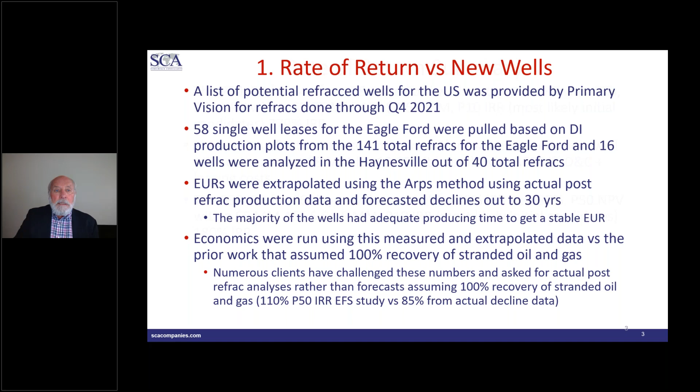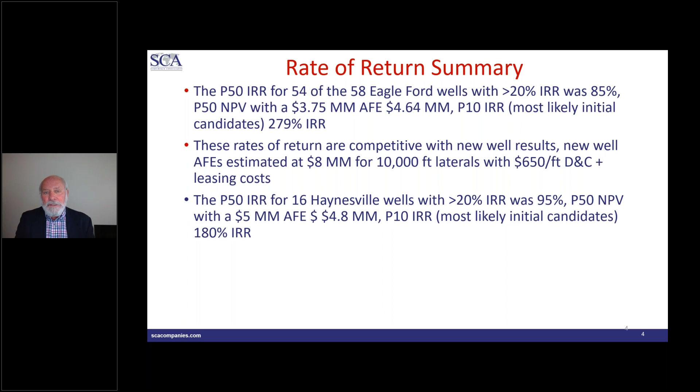Basically, the P50 rate of return was 85%. So that's pretty good. I used a 20% rate of return cutoff, and 54 of the 58 single well leases met that cutoff. We assumed basically 8 million for the 10,000 foot laterals on the economics for the new wells. The Haynesville was similar, getting a P50 rate of return of 95%. Definitely competitive. And the thing is, your first refracs are probably going to be from your P10s, not your P50s, and the rates there are way off the charts.

New wells are not a constant. You could have a 50 barrel a foot new well or a 60 barrel a foot new well. If you've got a lot of 60 to 70, 80 barrel a foot new wells, you probably can't compete with refracs. But look at this chart here in the Eagle Ford: take an average GOR of 1054, your P50s at 85%. You've got to have 55 barrel per foot wells, assuming 10,000 foot laterals, to make that new well have a higher rate of return than the refrac.

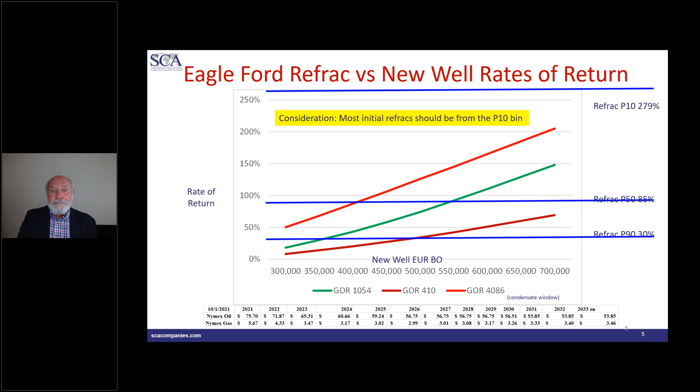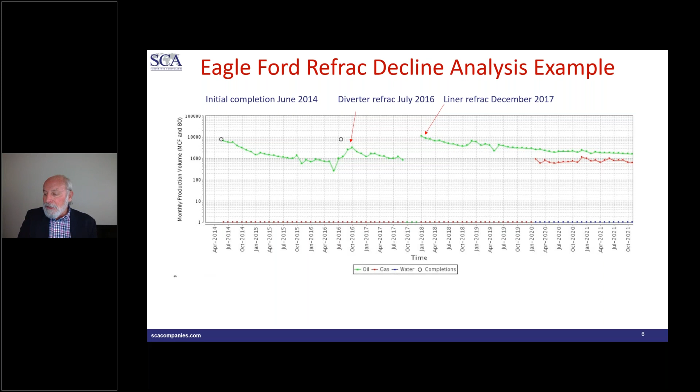So it's definitely competitive. Some examples - this is one from the Eagle Ford. It actually had two refracs: a diverter refrac in July 2016, and then a liner refrac in 2017. Pretty good decline number, more than enough data to get a good decline on there. All these had more than enough history to get a reasonably good tie - we didn't have any with just a few months production, most were pretty good. The original completion was 776 pounds per foot, 17 barrels a foot loading, 51 foot clusters.

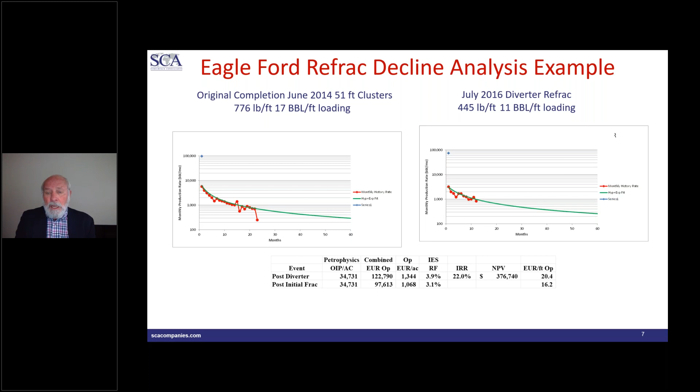The diverter refrac actually had a positive rate of return, albeit 22%, with a recovery factor of about 3.9%. The original recovery factor was 3.1%, and the diverter refrac in 2016 increased that to 3.9. It was actually economic, assuming a 1.5 million diversion refrac cost. But the big money is the liner refrac.

In December 2017, they did a liner refrac, 17-foot clusters. Here's your loading on top there, pretty much typical loading for recent wells. Look at the economics on that: 79% rate of return. That works all day long.

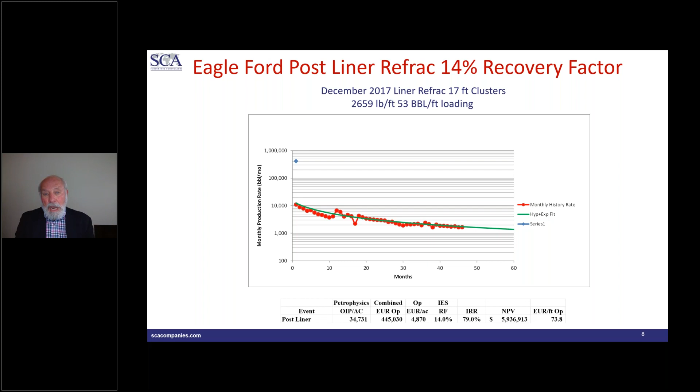The key thing there is the recovery factor. Theoretically, you've got a 15% maximum recovery factor for any of these, given the solution gas drive. This was getting close to 14%, and we'll show you in a little bit that that's actually higher than what we're seeing on new wells in the area, which was very interesting. We didn't expect to see that.

Cluster spacing - it's all about cluster spacing. This model was for the Permian, but very similar perms here to the Eagle Ford and really organic shales in general, liquids rich. You had 50-foot cluster spacing on the original frac model, and basically 5.9% is predicted.

The actual was 5.8. This was not the well we just showed, but another well we just looked at. The rate of return on the left side, depending on the 20-foot cluster spacing, we're seeing a little bit better than that. But at any rate, it's 9.6 versus 11.4.

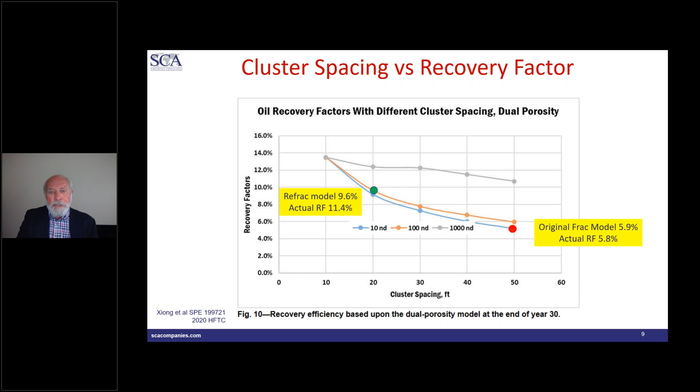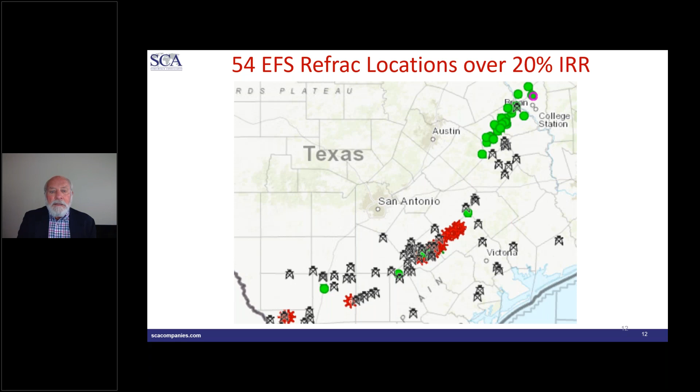One thing that was interesting in one of the areas was that the actual post-refrac recovery factors, which basically took the cumulative production prior to the refrac and then the extrapolated UR from the refrac forward, you're seeing an average of 72 barrels a foot on these recoveries, where the new wells with pretty much identical completions, actually a little bit higher proppant loading for that matter, 46 barrels a foot.

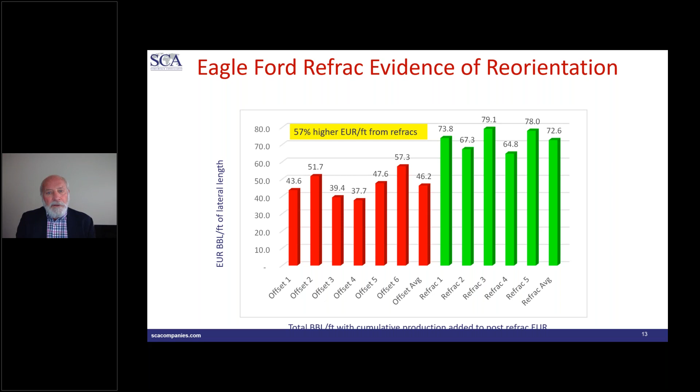And you can see the distribution there. It's not just a random picture. It's fairly consistent, and these are all pretty close to each other.

So we think it's evidence that your fractures are reorienting. You could be getting some from having a little bit more frac length, but that's unlikely because typically frac lengths, you don't see too much in the production history matching or interference tests more than 300-400 feet at the most. So longer lengths, I don't think are going to help you that much, but they may. We think reorientation is what's going on.

So that's interesting. Now, again, that's specific to the Eagle Ford. I'm not saying you're going to have this in the Haynesville because the Eagle Ford's got a relatively low stress anisotropy. So you only have to deplete the well about 1,000 pounds to overcome the maximum stress contrast that the original well had. So at most depth.

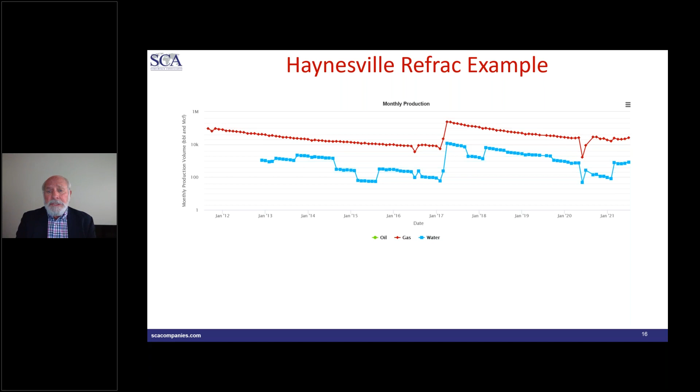So anyway, but Haynesville's next. We looked at that. We had 16 examples. Here's a good example from there. Definitely got a good uptick from the refrac. There's your post-frac analysis on that particular well. 81% rate of return over in Bienville Parish.

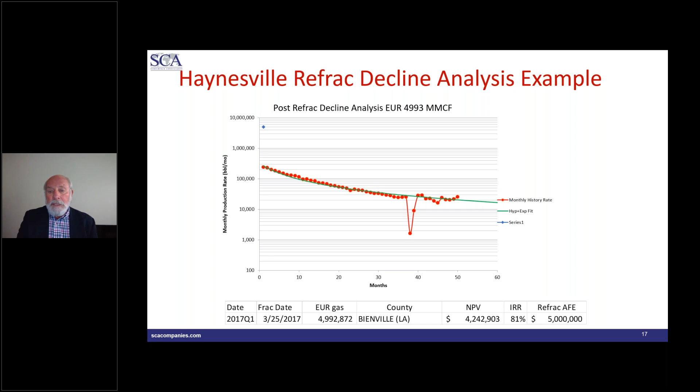I've used a $5 million AFE on the Haynesville and a 3.75 for the Eagle Ford, but pretty strong, and so basically I think all 16 were economic. There's your numbers there, distribution. Again, your first ones are probably going to be in the P10, which is going to be around 200%, which is definitely competitive with new wells.

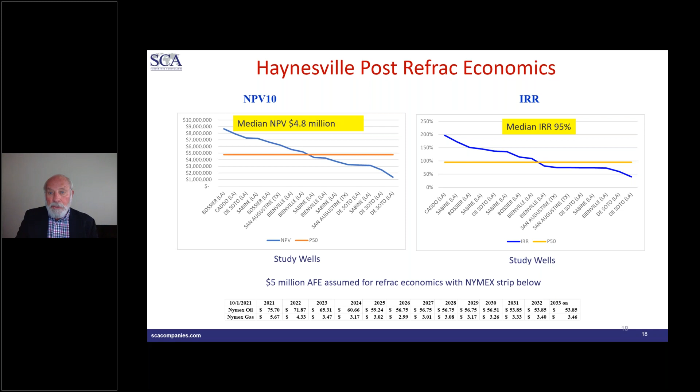I mean, the argument that refracs are not competitive with new wells is just not really supported by this data. It might have been in the past when they had diverter-only jobs where you don't have the mechanical isolation, but with mechanical isolation, the risk is largely eliminated on the execution, and then they're getting that down pretty well.

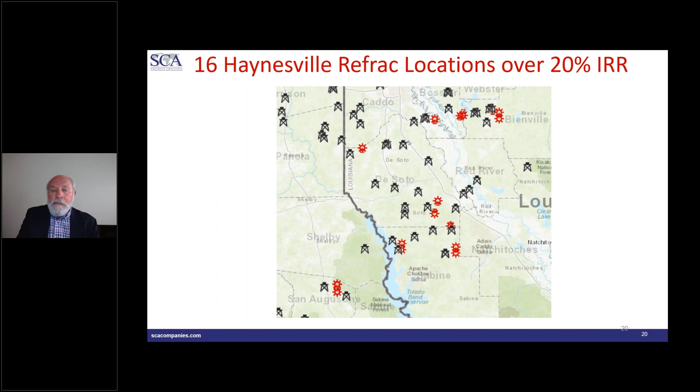Here's where the locations are, pretty well spread throughout, most of them in Louisiana. That's where most of the activity is anyway, so it looks good in the Haynesville as well.

The next big benefit in terms of rate of return, being larger in some areas, is that you protect infill child wells from asymmetric fracs. There's a lot of evidence showing this is a problem. It's probably the 800-pound gorilla most operators aren't really dealing with, based on conversations we've had, where they're using these quote-unquote small volume preloads, which basically do nothing to protect the child. They do help the parent from having to be cleaned out, but we'll show you examples where that was disastrous when they actually went with a larger volume preload, which is what you need to do if you don't refrac it.

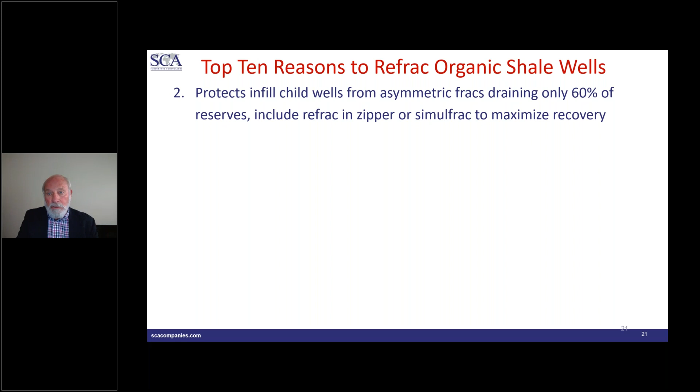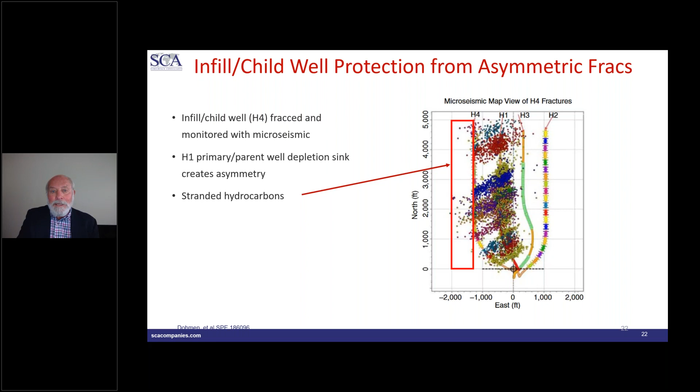The other thing that came out was the sealed wellbore pressure monitoring, showing the same thing - that parent well depletion basically created an asymmetric frac where the distal side of your frac is not going to be drained in the child well. So it's a huge problem.

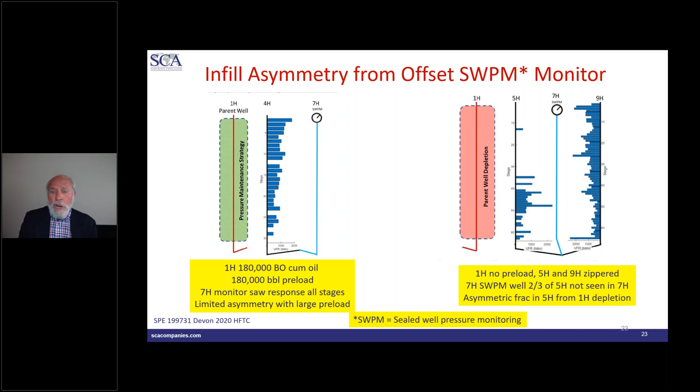How much of a problem is it? We'll get to that next, but really the only options you have here are to recharge the parent as a full volume preload, which you've got to elevate the reservoir pressure up pretty close to where it was originally, or you do a refrac. The volumes required are pretty substantial for that, but compare it to the cost of actually doing that.

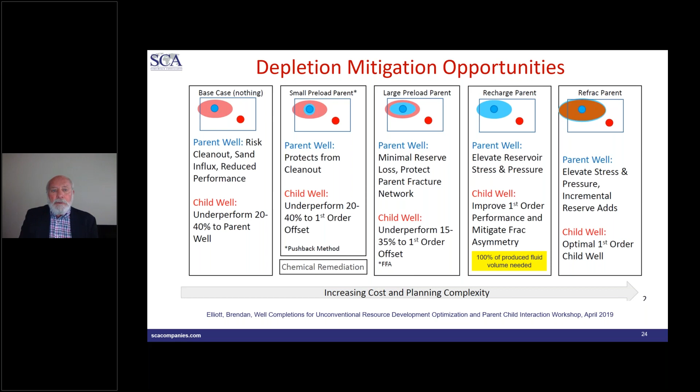If you've got a 500,000 barrel new well with a GOR of 1054, basically your PV10 loss is over $4 million. So the loss of production from the child well not being protected by the parent well refrac can be almost as much as the rate of return on the entire refrac. It's definitely a big number, but a lot of people don't really want to deal with this for some reason.

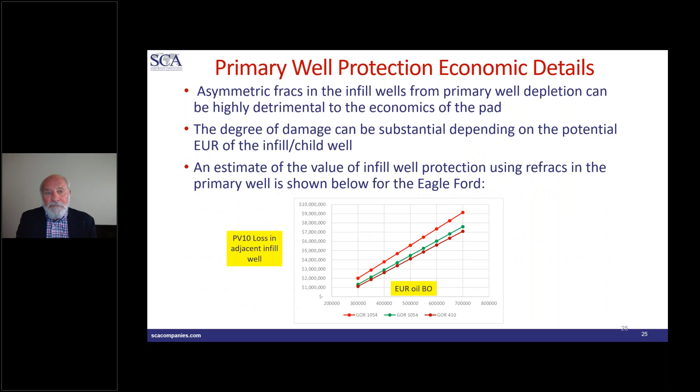We got a case study from the Delaware Basin. Again, it's not Eagle Ford or Haynesville, but this is again mechanical in nature, not necessarily formation specific. They did a 225,000 barrel preload and a 157,000 barrel preload on 2 wells. The initial EURs were just about 1.3 million on both. Post preload, it was bad - one was down to 500, one was down to 107. So basically, with these 2 wells, you could have paid for 9 refracs with what it cost you on just the parent well production loss, not so much the child well.

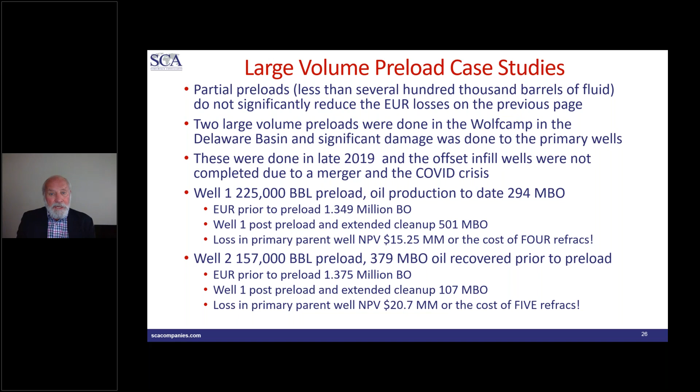They never did offset this - this was a well that came in. These were done right before a merger. So there's your numbers - you're chugging along pretty good, strong EUR, but putting all that water volume in there, you just couldn't get it back. So a refrac would have been far superior here than trying to do the full volume preload, which again is the only other option - small volumes don't really work.

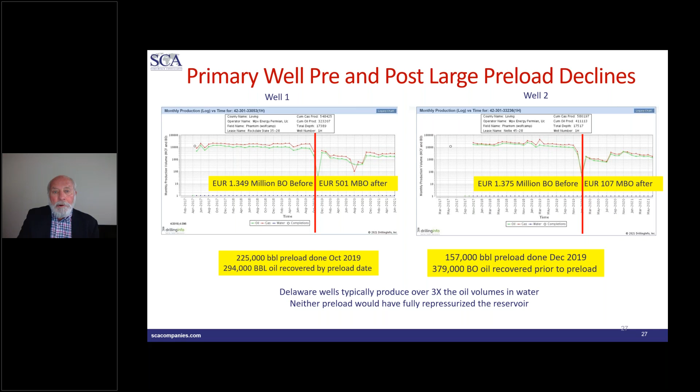So the next reason: you've got a huge volume of stranded reserves. Again, the cluster spacing is really what drives it. Refracs can have 3 to 4 times the original recovery factor. A lot of these older wells with 50, 60 foot cluster spacing are seeing 2%, 3% recovery factors. It's basically cluster spacing that's the main driver, because we're actually putting less proppant and fluid in per cluster now with the newer fracs, just because you have more clusters.

I don't know any area in the world where you put larger fracs and get lower results. So we're actually putting smaller fracs on each cluster, but we're getting better results. That points to cluster spacing really being what's driving this. One study done in Eagle Ford showed only 7.5 feet of lateral distance being drained by each cluster, versus the 50, 60 foot spacing.

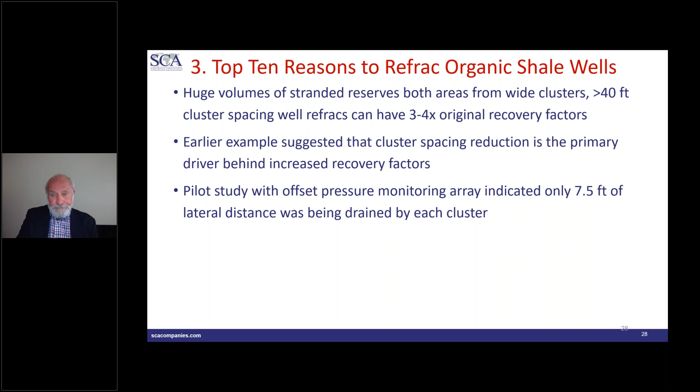The original Eagle Ford wells had over 100 foot cluster spacing, so there's a lot of undrained rock in there. Here's that pilot well done by Conoco, and again it was an eye opener, because basically only 15% of your 50 foot cluster spacing is being drained, so there's a lot of opportunity for increasing the entry points in between.

What we're seeing is that, by and large, the cluster spacing assumption from the model we had before is pretty spot on. We're seeing that pretty much as a maximum. If you've got 50 foot cluster spacing, and you use the plot we had earlier, you can predict what the recovery factor is going to be.

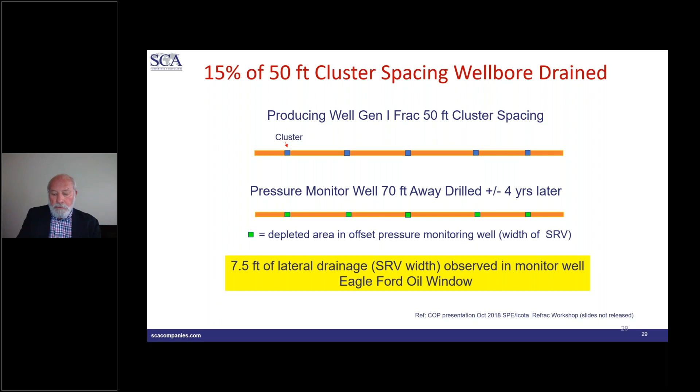How many wells have got large cluster spacing? Well, 2015 was kind of when everybody started getting on board. Again, you had a few people experimenting with some of them here, but by and large... let me get my pointer. I lost my laser.

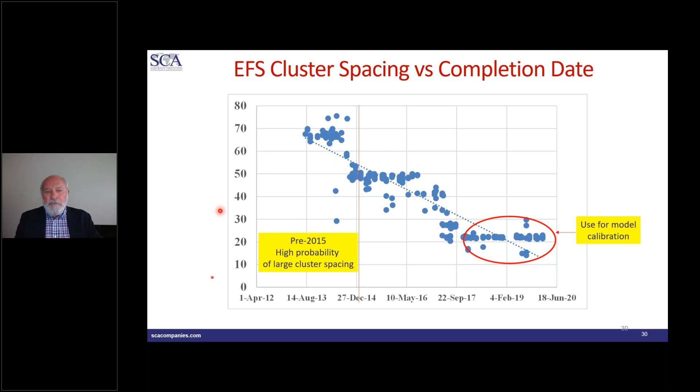Pre-2015 is probably the target-rich environment, although you've got some out here too. Keep in mind that a 40-foot cluster spacing with 60% cluster efficiency, which is what you typically get with diversion, is more like an 80 to 90-foot cluster spacing. So your nominal spacing may not be your effective spacing on these.

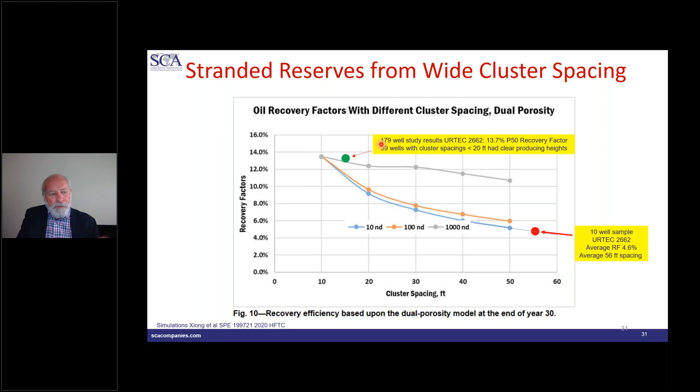You can actually back out the OIP from this, or the minimum OIP, if you just divide your cumulative production or your EUR, depending on what you want to use, by the recovery factor for this, and then do your 13-14% number. It's kind of a quick look, not to be replaced by the oil in place and gas in place number, but it's a method to use.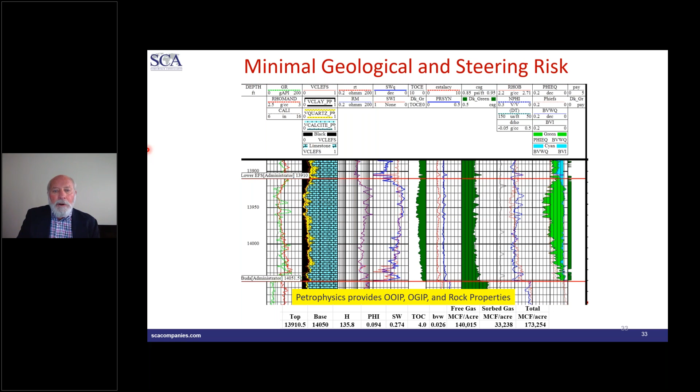The geological risk is minimal. You've already got the logs most of the time. Here's an Eagle Ford log, I think from DeWitt County, but you can go in and basically know what your hydrocarbons are, know where your lateral is. There's no surprises. You're not hoping and praying that you got the right zone, you're in zone, you know where you are. So you've got very little risk as far as what's going to go on there.

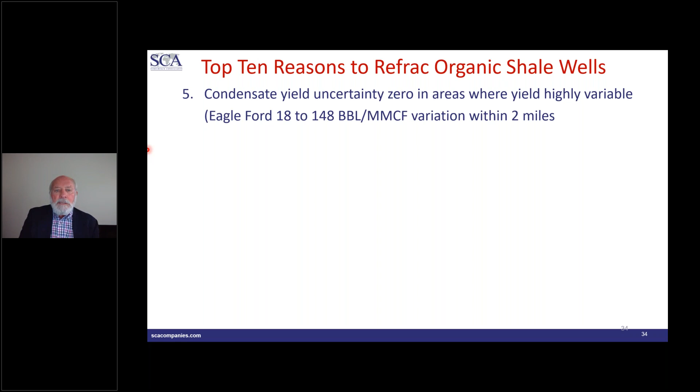One thing big in the Eagle Ford, you notice those little red spotted wells on the map. A lot of those are gas condensate wells, and basically the condensate distribution varies quite a bit. We saw 18 to 148 variation within 2 miles down in LaSalle County, which is the example we had next. So I mean, if you've already got a condensate yield prior to the refrac, from the original production, your refrac ought to be fairly similar, and it reduces some of this uncertainty. You can see there's a pretty huge range here. So that's a help. Okay.

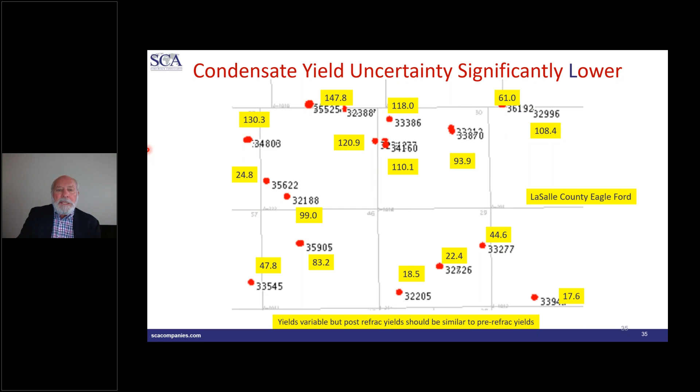One thing we know is that your recoveries are pretty much going to be consistent if you do a best practices refrac: fairly close cluster spacing, adequate proppant and fluid loading, slickwater, pretty much everybody's gone to that. 13.7% is what we're getting for a P50 on oil, 40% on your gas condensate, and 60% for dry gas. We don't have that many samples for dry gas, but it should pass the smell test, because conventional is a little bit higher.

To get the full 15% on oil and a full 70% or so on the gas, you'd think you'd have to have cluster spacing that's tighter than what people are using. Again, if you're draining 7.5 feet, and even with 15-foot clusters, you still have undrained rock there. That's what I think we're seeing with this reorientation. We think the reorientation is actually widening that window, and that's why the new wells underperform the refracs in that study we showed earlier.

The seventh thing is you've got less pressure on the supply chain. That's a big thing right now. You don't need new casing in the vertical section, tubing, pumps, all that. Basically, you've got a lot of stuff out there already that you need, so you don't have to go get it.

And with the supply chain issues now, that's not an insignificant factor. One thing one of the majors I talked to a few weeks ago was looking at real hard is if you get enough of these going and consistently hit successful results, if you're economic in all your cases, you've got PUDs.

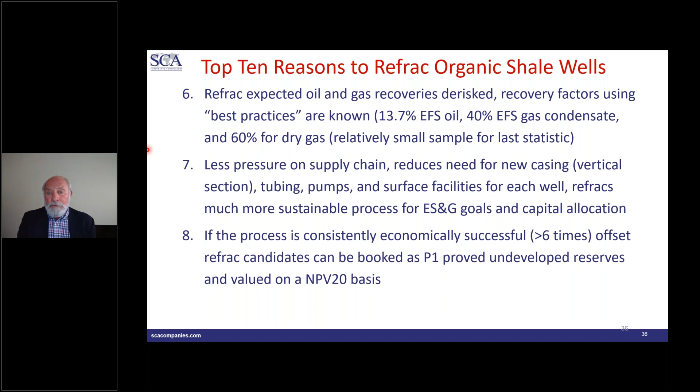And I've had 2 reservoir engineering groups bless this concept that basically you can book P1 reserves with refracs. Nobody's done this yet because very few people have this consistency. Back in the diverter days, you couldn't really guarantee that, and your EURs weren't going to be that significant. But with the liner days, if you can get back to almost the original total recovery factor from a brand new well, you got some pretty good PUD values there. That could be a significant addition to the asset base, but if it's done right.

Carbon footprint's a buzzword now. I don't know how many ESG conferences or ESG papers I see going on, but you basically don't have to drill a well, which is a huge carbon use. Just the drilling uses up to 40,000 gallons of diesel, which is quite a bit of carbon. So this is good for trying to check that box, which is becoming more and more important.

Again, no mob, no drilling. There's a lot of moving parts eliminated with the refrac. And then last thing, really the most important thing, because it's what points to being able to have successful refracs consistently without surprises, is mechanical isolation. With using expandable liners or cemented casing, the results on the reservoir are fairly similar. You're a little more expensive to use the cemented, but nonetheless you ought to be able to get the same results, and you ought to have a competitive rate of return versus new well drilling.

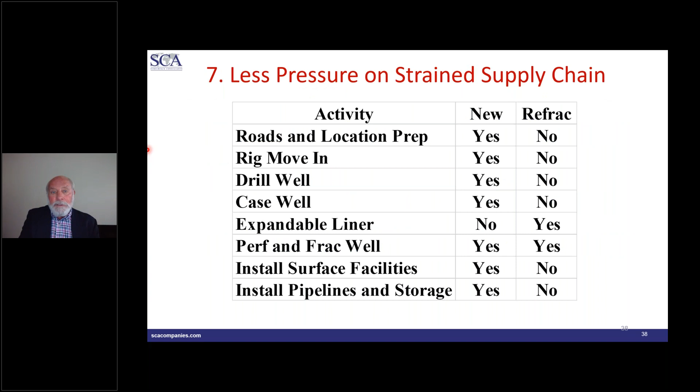Okay, these are the things that basically you don't have to worry about. A lot of moving parts are removed. This is the PUD discussion we talked about earlier, and there's the reference there. I can get you that reference if you want.

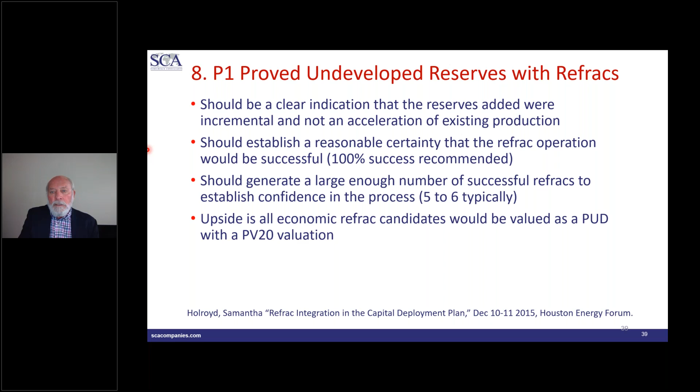So again, 5 to 6 times, that's not cast in stone, but basically you have to show that you're not going to mess up. You have to show that each refrac is going to be successful. With the proper candidate selection, which is fairly straightforward, the proper execution and best practices, the risk of failure is pretty low. It's never zero, but it's pretty low right now, a lot lower than it was back in the diverter days.

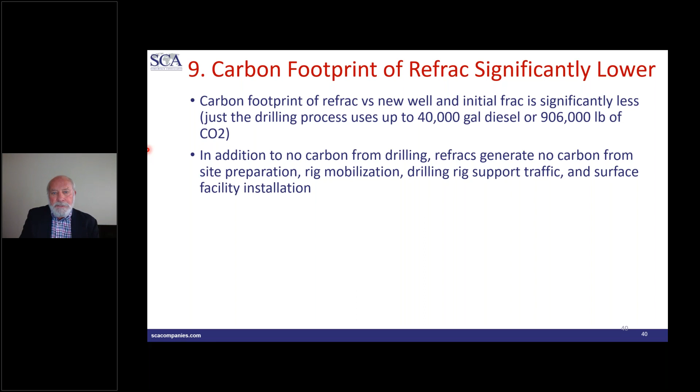The carbon footprint again, a lot less moving parts, a lot fewer vehicles going out there. The whole entire drilling process is gone. But the last part, the mechanical, it bears a little bit of investigation here.

Looking at XLE is very important, extreme limited entry, because one thing about XLE is a lot of the studies that were done, in fact almost all the studies that were done, were on new wells, where the reservoir pressure is fairly homogeneous among the clusters. And refracs are not that case.

You could have several thousand pounds of drawdown. The equation for the delta P required incorporates the delta sigma, the closure stress difference. It's near wellbore friction, breakdown pressure goes into that, basically any kind of tortuosity like near wellbore. Those are all factors in there you have to overcome.

The original rules of thumb of 400 pounds back in the 80s we used was making several assumptions that you didn't have that much heterogeneity. But now we're seeing that in order to get good distribution to control fluid loss into the lower pressure, higher permeability clusters or natural fracture areas, you need about 3,000 psi, and that number could be larger for refracs theoretically.

Again, because that's a new well, those 2 papers referenced there are all new wells. But anyway, you don't want less than that. And what we're seeing on a lot of these studies is that operators are still not really buying into this. Typically the ones we have in the example that went over with the refrac reorientation were all around 500 psi delta P.

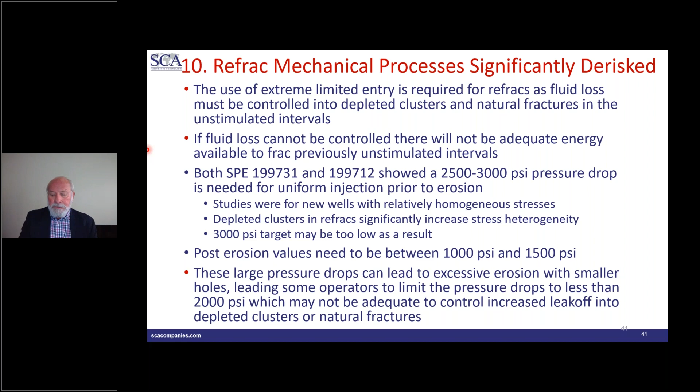There's one from Devon, a really good paper on the volume to first response from this sealed wellbore pressure monitoring. Basically the idea is if you've got high delta P's and you limit your fluid loss into the runners, then you're going to see a very long delay or high volume pumped before you see a hit on your offset well.

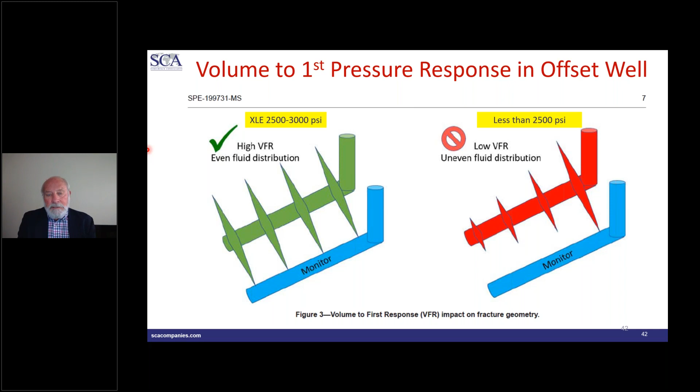And you're looking for pressure. You've got a pressure monitor on the blue wells that shows at the surface when the pressure wave hit from the refrac. Less than 2,500 pounds, you're going to see uneven fluid - you're going to see fairly early hits. There's been a lot of work on avoiding frac hits, but I think if we get everybody going to XLE and doing it right, I think those discussions are going to be reduced quite a bit.

Here's another plot here, basically showing that at 500 to 600 barrels, where a lot of these are, you've got a really low delta P there. You're not getting the delay. You're getting some runaways, you're getting some very early hits there on those little blue ones up to the left - these are very early arrivals. You're not getting high cluster efficiency. Out here, you're getting very high cluster efficiency.

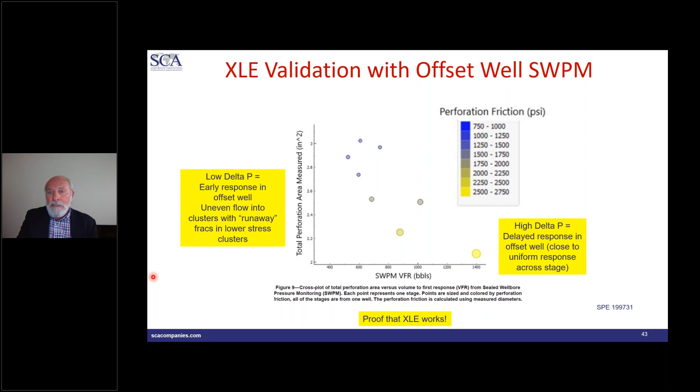And this has been backed up with fiber optics. There's a paper just presented a couple weeks ago at the Refrac conference, showing much better uniformity with the higher delta P's and the single hole at the top of the casing, which is what we're recommending - talk about that coming up. But yeah, this is definitely proof that it works, but it also shows that if you've got lower pressures, you can expect to have basically lower than you need cluster efficiency.

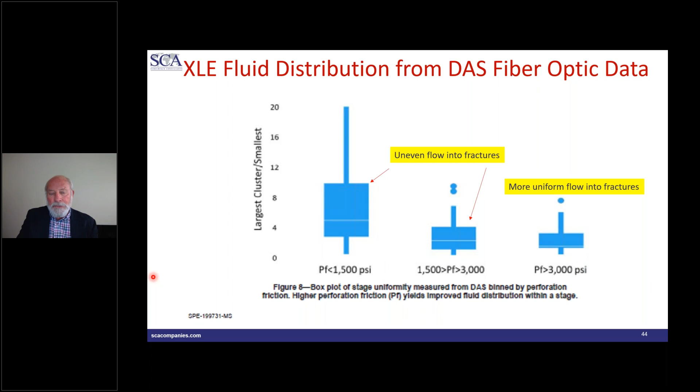Another case here, a lot much more uniformity with the higher delta P. Less than 1,500 pounds, huge scatter. So it's definitely a number that you need to look at. And like I say, most operators I've looked at, most of the completions I've looked at are not doing this for some reason. The big thing is post-erosion.

Here's one where they had 5,000 pounds pre-frac and pre-erosion, then down to about 400 or 500 pounds after it. So this is the big problem with the perforation erosion - you've got to try to have this effect minimized to get at least 1,000 to 1,500 pounds post-erosion. That's really the big number. The pre-erosion number is not as important as the post-erosion number.

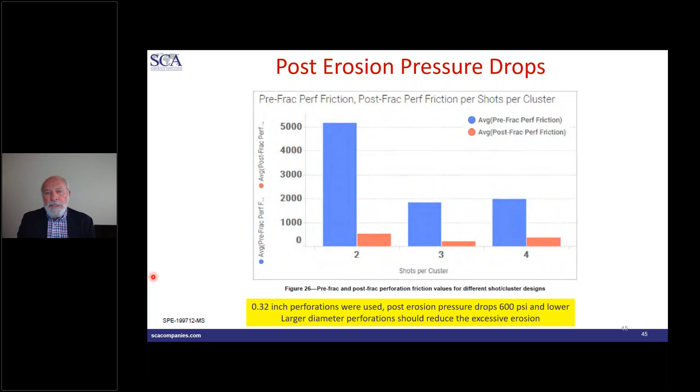And what we're seeing is there's evidence that larger perforations can give you this. The single holes at the top, and we're recommending about a 30-degree offset. You'll introduce a little more tortuosity than you would if you had it right at the very top. But I've heard of 2 operators that have had problems with excessive proppant flowback when they put the holes right at the very top, since the hole is lined up with the fracture.

You get the longitudinal fracture initiating at the top of the wellbore to start with, and then it flips to transverse. But if you've got that hole right there, I think you're going to get more proppant flowback. I don't know if anybody's tried that yet, but that seems to me to be a logical way to do it. Again, you want to try and limit the length of the longitudinal if you can. A single point is going to be better than a 2-foot span, which some people are still using. Larger perforations from that SPE paper showed better results over smaller ones.

And it was an interesting study that Repsol did in the Marcellus. There's a reference there that going from 0.42 to 0.46 had quite a remarkable effect. The erosion dropped down quite a bit. You had much more uniformity. Your tortuosity dropped down, and also your breakdown pressure went down. And tortuosity and breakdown pressure are both part of the XLE equation. You're basically giving it a much clearer path and putting a lot more energy into the frac when you do this.

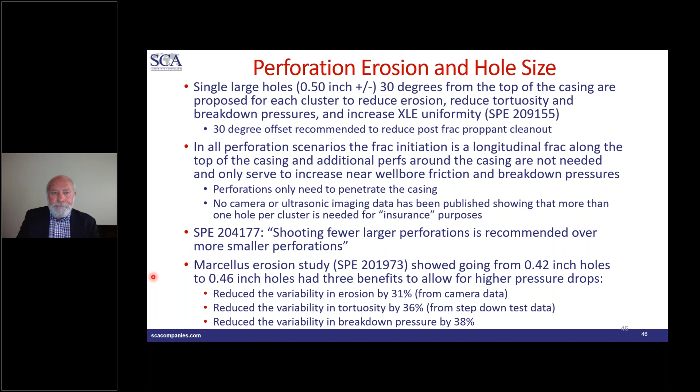Are people doing this yet? Not yet, not wholesale, but there are several people who are, and the ones that are doing it seem to like it - the single shot at the top of the casing.

Another little cartoon here on the longitudinal fracs. You spread this out over 2 feet. A lot of people use 6 shots per foot over 2-foot intervals, sometimes 1-foot intervals. You've got a much longer area. Does this make a difference? It's something worth looking at. It's not going to hurt you, having a single point. Ideally the initial longitudinal frac is probably going to be less long, possibly. Again, this is something that can work.

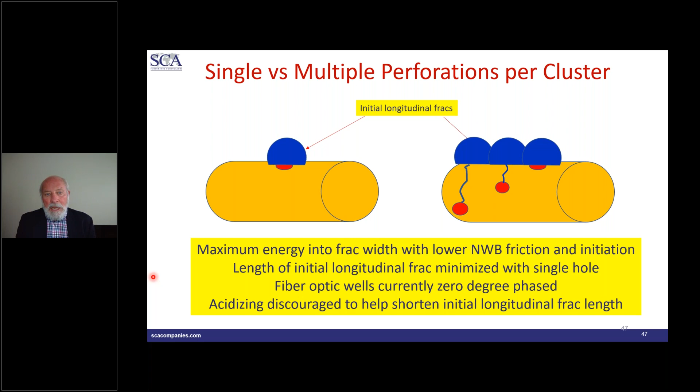And the other thing that came out of the last conference in Scottsdale was that some of the operators have noticed that acidizing doesn't help this. If you run a lot of acid ahead of time, you can actually get more communication between the stages.

One of the problems is that you've got to use the 0.5, 0.5. When you look at the numbers for delta P at say 90 barrels a minute with 15 clusters, that's 6 barrels a minute per cluster or more. Typically people are going higher, 6 to 9. You see 9 is fairly good, 8 to 9. But you need a 0.5-inch hole, because if you go smaller than that, you're going to have way too much friction. You're going to have like 6,000 to 7,000 pounds of friction if you go with a 0.4 hole.

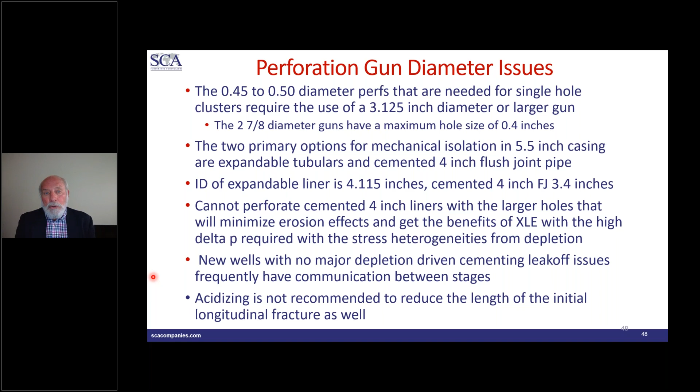So on the refrac, that kind of limits your choices. You really need to have that ID to get the larger gun size in there, and this talks about that. So it does restrict your options as far as how you complete it. It's because the cemented 4-inch, which is probably the most commonly used system right now, the biggest you can run is a 2 7/8, and that's going to give you a 0.4-inch hole. With 0.4-inch holes, you're going to erode faster, you're not going to have as good control, and a lot of the benefits of the single shot go away when you start doing that.

Communication between stages is an issue. Again, this is about the initiation of the longitudinal fracture. One thing with refracs is that if we are getting reorientation, say in the Eagle Ford or Barnett - I'm not sure it happens in the other formations yet, we haven't documented that - but if you're getting much wider SRV from the reorientation, you might be able to move your clusters farther apart.

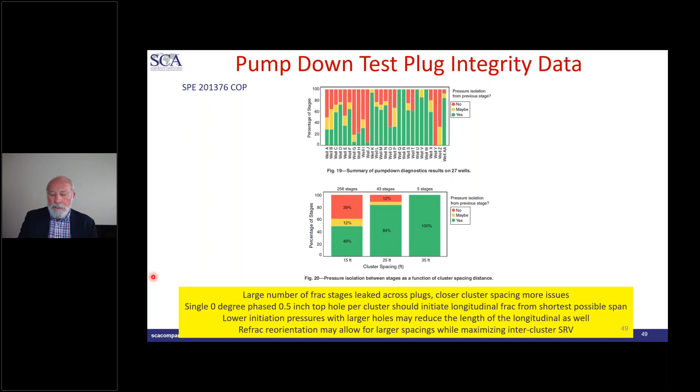This Conoco paper is suggesting that with your 15-foot cluster spacing, you're having quite a few leaks between stages, you can see communication. We're going out to larger spacings to help that. So the refracs may be more forgiving than new wells in this respect, in terms of giving you that. Again, that's just speculation at this point, but something worth looking at.

Okay, to summarize, expandables typically make more sense for larger holes. Again, full disclosure, I work with Enventure and they do expandables, so I apologize for the commercialism, but the fact is that you really have to have the larger holes - you have to have the larger diameter to be able to do that. So, at any rate, 30 degrees off vertical is what I'm recommending.

You go much farther than that, you're going to have increased tortuosity, and tortuosity goes into that delta P. You really need as much delta P as you can on these. So if you can lower your breakdown pressure, you can increase your uniformity and lower your near-wellbore tortuosity - that's all going to help add to that delta P to get the diversion going. What Conoco's doing now a lot is post-frac step-down tests, which are pretty good. That paper referenced on the previous slide has got that, to see what's going on. We may have to spread these out a little more.

I know from the reservoir perspective, going to 15 feet makes a lot more sense. We're seeing good results, but if your stages are talking to each other, that kind of limits that effectiveness there. And the sealed wellbore pressure monitoring is great. If you've got the opportunity to do that on offset wells nearby, that's a really neat little technique that can try to verify XLE success.

If you think you're getting good diversion, but you're seeing real early hits, you're probably not getting good diversion. And it's possible you might need to make wider spacing. One of the frac consultants out there has started to recommend 30 to 35 feet in the Eagle Ford, mainly because of the modeling in the frac model. But I talked to him last week about it. Basically, it's possible that with refracs and with reorientation, you can have wider spacing and still get pretty good drainage of the SRV.

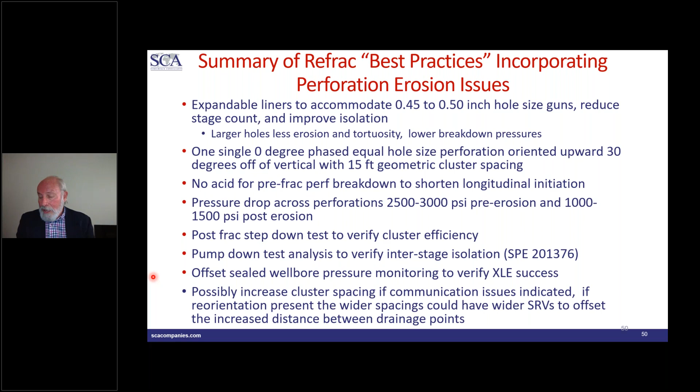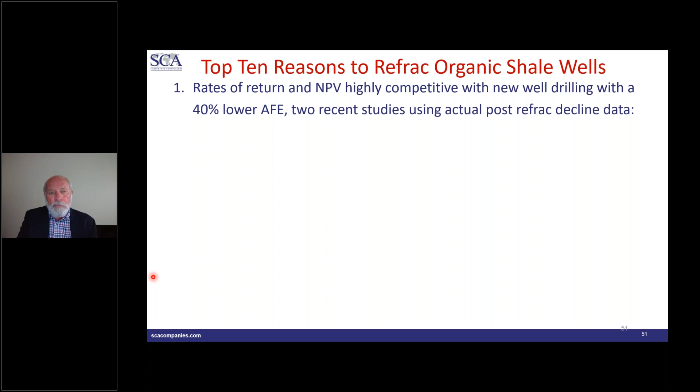So to summarize, the rates of return are highly competitive with new wells. Again, actual post-refrac results confirm that. It's no longer just theoretical. You've got the hard numbers now on a decent number of wells. Haynesville, same thing, really good competitive rates of return. The argument that refracs can't compete on a rate of return basis is just not supported by the data.

Everybody's thinking of the old diverter refracs, I think. We always had a kind of a joke that the people who were out in the field during the diverter disasters are now in the C-suites, so that's why we're not seeing a lot of checks being written for these. But it's a whole new ball game now.

Since about 2018, early 2019, most operators have all gone mechanical. The only place doing a lot of diverter right now is the Barnett, but most areas are not doing diverter refracs that I'm aware of, at least not very many. Diverter-only refracs, I mean inter-stage, is not the same. If you use actual diverter within the stage, that's different, because that is going on. It's not as good as XLE, but it's better than not doing any kind of diversion.

The big thing, the infill child wells, the 800-pound gorilla, you've got to refrac these parent wells. Just put them in the zipper pattern. Just have a parent well ready to go, reline it, and put it in the normal pattern. It's not that big a deal.

In the small volume preloads, you're going to lose the reserves. Large volume preloads, you're going to kill the well. So you really don't have a lot of choices there. But unfortunately, very few operators are doing it. I take that back—a lot of the refracs done by several of the majors in the Eagle Ford are parent protection refracs.

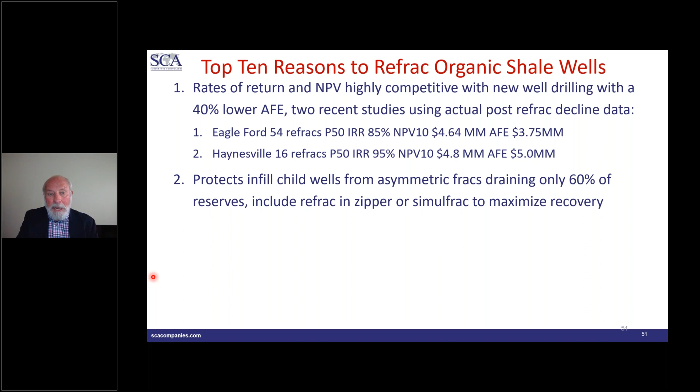Again, a lot of people are doing small volumes. That's not a good idea. The refracs make a lot more sense there. Again, huge volumes of stranded reserves—look at that cluster spacing versus recovery factor plot. You can have up to 3 to 4 times the original recovery factors on these, particularly if you have poor cluster efficiency on the initial wells.

The Schlumberger study showed that 2 out of 3 clusters are producing. The Liberty study showed a 59% average cluster efficiency without diversion, which basically means your 40-foot clusters are more like 60-foot clusters, and you can run the numbers on that.

So there's a lot of oil and gas out there stranded. There's over 8,000 wells in the Eagle Ford that have large cluster spacing based on the completion times. Prior to 2015, it's like 8,500 or so. A lot of wells there. You've got a pretty big inventory, and we did a preliminary economic analysis of those.

Basically, you were seeing about 70% of them look like they're going to be economic. So it's not 100%, because some of them were doggy locations initially drilled, but by and large, there's a lot of inventory out there for refracs. I didn't run the numbers on the Haynesville, but it's probably fairly similar. There was a lot of activity up there back in 2010 before people really got into close cluster spacing.

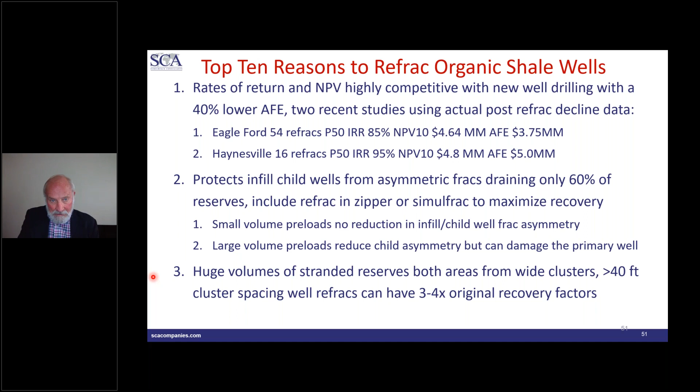Where are we going here?

The condensate yield, again, if that's an issue in the Eagle Ford, basically you got that nailed down going in. You know what it is. You don't have to guess.

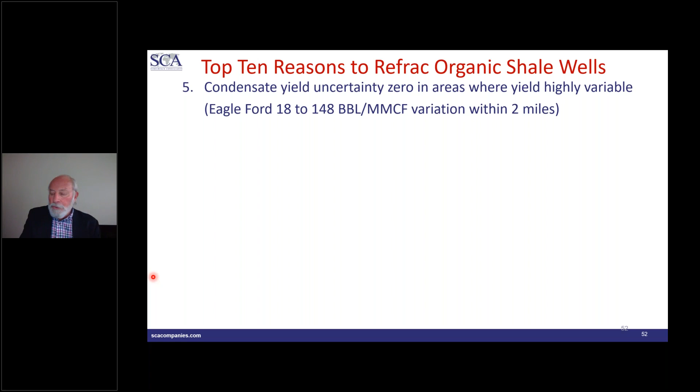When the recovery factors are getting fairly consistent right now, we're seeing enough data to support this. So if you know what the current recovery factor is, if you got a 3.7% recovery factor right now, you basically got another 10% left. So whatever your OIP is times 10% is going to be your expected recoverable. And using that assumption, we're getting pretty close to the same rate of return as we are from the actual results.

That's a good story that came together. Originally, people said, well, how do you know you're going to get all the oil out? With a refrac, you're assuming you're going to get all the stranded reserves out. And he goes, well, you're right, but we're getting actually more than we expected. So that was a pleasant surprise. I assumed it was going to be less going in, but I think with this possible reorientation, we're seeing higher than expected recovery factors with the refracs.

Again, it's a lot fewer moving parts, which is a big issue right now. Just getting stuff out to location, getting people - it's all a hassle right now. It's not real smooth out there, and you're eliminating a lot of these loose ends by doing refracs. A lot of stuff's already done.

And if ESG, compliance or sustainability is an issue, which a lot of the capital providers are starting to ask for, then you're checking that box pretty nicely and also making money. So it's not just a symbolic gesture - it's really a tangible action that's taking positive steps to give you a better rate of return.

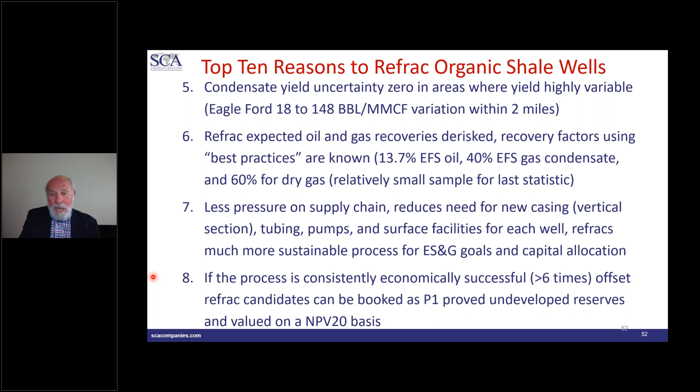Again, the booking is a biggie. Nobody's done this yet, to my knowledge, but the companies that have done a lot of these refracs are looking at it hard, because that could be a huge boon. If you've got refrac candidates behind pipe, you can document and show that you can do them successfully, consistently. Again, it's got to be consistently economically successful - that's the big thing. So if it's spotty results, then you got to start over again. But would it work? I haven't seen any reason that won't.

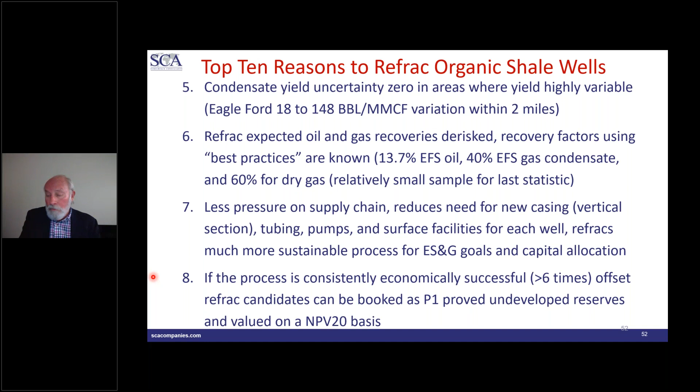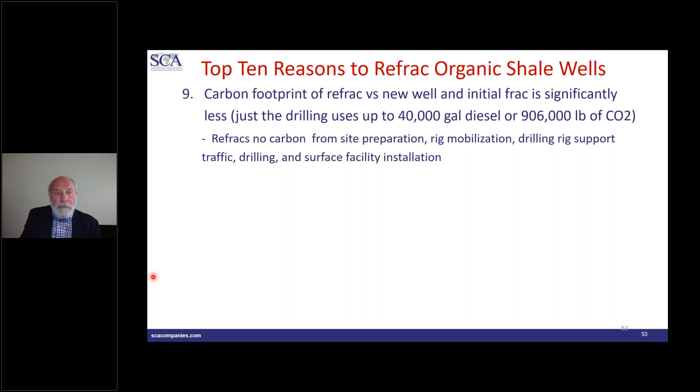Carbon footprint's lower, quite a bit lower to start with. Your well's already drilled - none of this stuff needs to be done. So it's a lot less traffic. It's just overall a lot more sustainable process. It's got a lot fewer moving parts, and dollars to dollars, you're getting the same return as you would on a new well.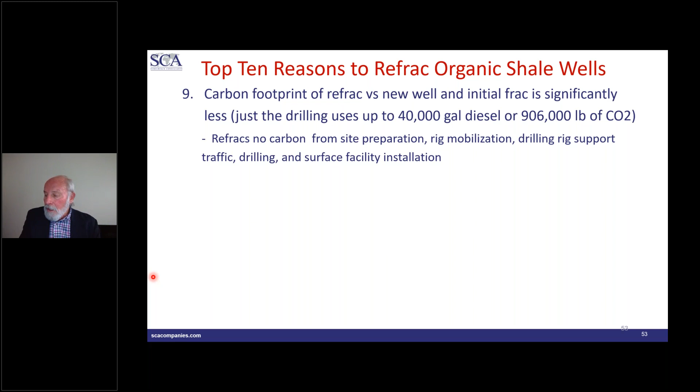Now, comparing it to a DUC, not so much, but comparing to a well that you haven't drilled yet versus a refrac, your money is going to be just as well spent on refracs, which is something most operators don't believe right now. Hopefully this type of information will start pushing the needle in the right direction on that.

And again, the mechanical isolation has been the game changer. Most people are not aware. Even today, we're talking to people and they say, well, we heard we had problems with it about 5-10 years ago. The technology has improved quite a bit with expandables, and people have gotten pretty good at putting the 4-inch flush joint in and getting it cemented. So the execution, as long as you get the wellbore cleaned out - which is really the big one - if you got proper clean out procedures in place, getting the liner down to bottom or getting the casing in there is not a huge issue.

There aren't that many failed attempts that we've seen out there. So, but you got to do it right - you can't just go out there and wing it. But at any rate, that's the big game changer right there: mechanical isolation adoption, which has really only been around for about the last 3 years or so. It's not something that's been around.

7-8 years ago, almost everybody was doing refracs with diverters over the entire interval. You have over 1,000 perforations sometimes as you're trying to divert. If you look at your barrels per minute per perf that you're trying to inject, it's pretty low. You're not going to get much done at 1/10 of a barrel a minute per perf, until you start diverting.

But that's all I've got. I'd like to open up for questions, and hopefully we stimulated some thoughts here and some ideas.